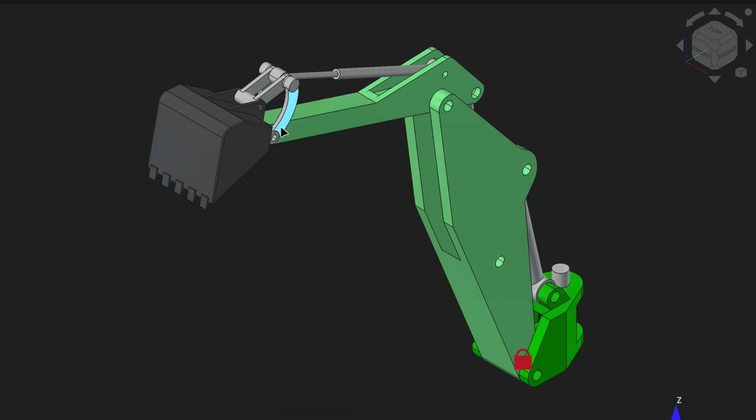FreeCAD has evolved rapidly recently. To make use of the new features, I'm doing a tutorial here to show you how to create this threaded bolt in just a few steps, for example, for 3D printing. Today, we want to design a simple bolt with a 1/4 inch internal thread and a square head. With the right approach, this is done in a few simple steps.

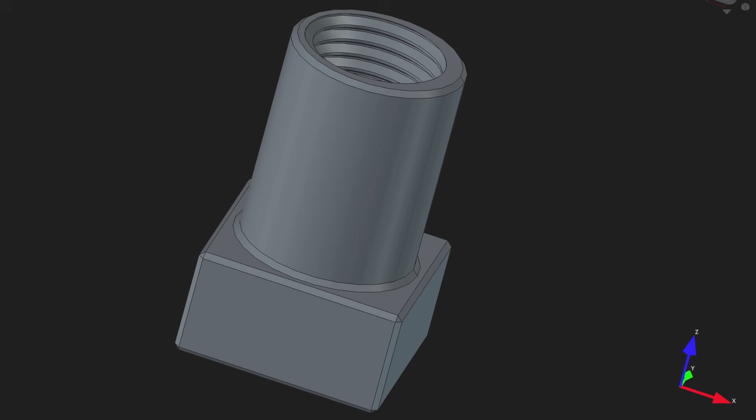To do this, we first create a new file. We select the correct workbench, in this case, Part Design. Then, we create a new sketch. For this, you may first need to select the body in the tree view on the left. Now, we select the plane we want to draw on. The XY plane makes sense here.

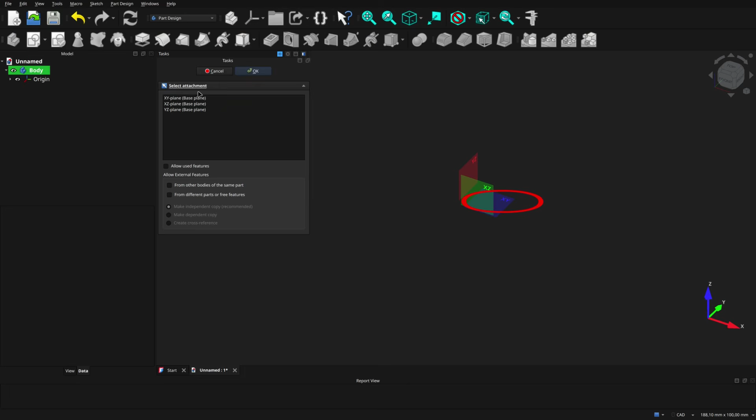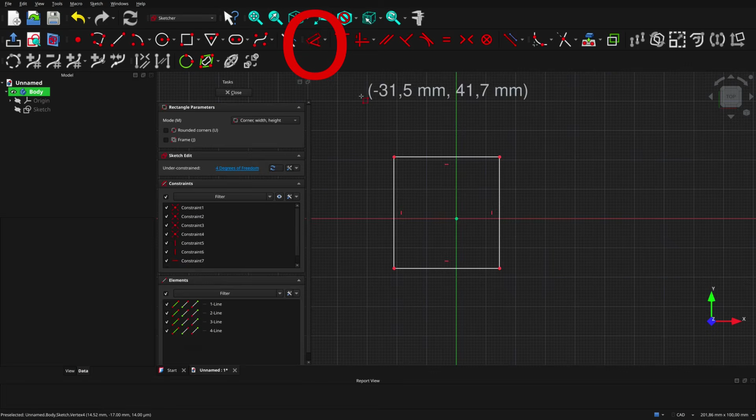It is important, especially for later, more complex drawings, to always construct around the origin as a central axis of symmetry. First, we want to create the square head for the bolt with a wrench size of 19 mm. We draw a rectangle around the origin in the center. We see 4 degrees of freedom in the sketch description, so we need to dimension the rectangle. To do this, we can click the lines themselves or the start and end points.

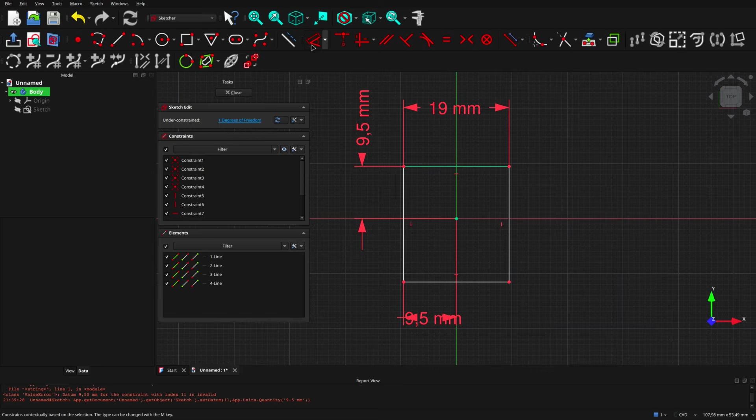For the position of an element, it is best to select the start or end point. The software will then automatically prompt for a dimension relative to the corresponding axis. The edge length is 19 mm, centered around the origin. Once the line is fully dimensioned, it turns green and can no longer be moved. You can always use this test if you are unsure whether an element is fully dimensioned, which happens quite often at the beginning. We do the same for the height, and the entire rectangle turns green. The sketch description now says fully constrained.

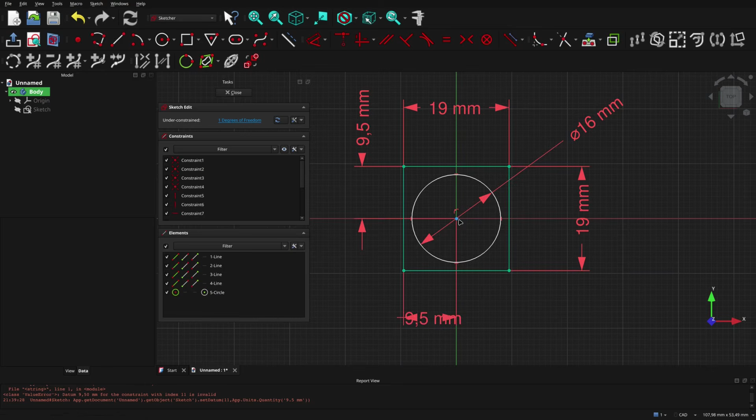However, we still need a cylinder for the threaded bolt. So we draw a circle and set the origin as the center point. It is important to hit exactly the origin. That way, we won't need to dimension the center point later. Now, we can either dimension the 16 mm diameter directly or do it later with the dimensioning tool, or change it if needed. The entire sketch should now be green and fully constrained. If not, you might not have placed the circle center exactly on the coordinate origin and will need to add dimensions manually. Then, the sketch can be closed. All necessary elements are present in our master sketch, the square profile and the bolt shaft.

Still in the Part Design workbench, we can now create a 3D body from this 2D sketch. For our sketch, the Pad feature is the one we want. Depending on the part, there are many other ways to further process a sketch. If the sketch isn't selected automatically, we need to select it. The best way to do this is in the tree view on the left. After that, we select the faces in our master sketch that we want to extrude. First, the cylindrical shaft with a 16 mm diameter. The face changes color and we can select the Pad option in the task panel.

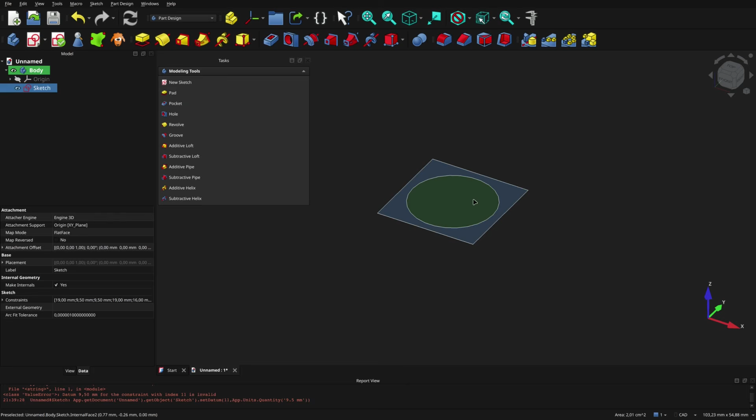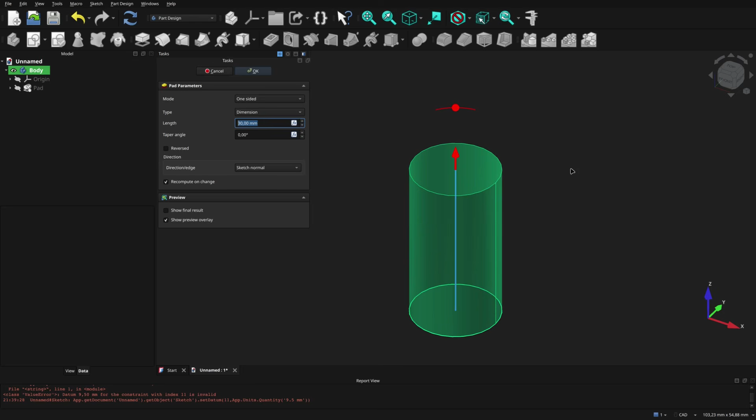Here are several ways to enter the direction and length. A very practical new feature is the ability to change the values directly in the model using the displayed arrows. This gives you an immediate idea of what the part will look like later. We simply want to extrude 30 mm in the positive Z direction, which means upwards. So, we set the value to 30 mm using the arrow in the model or in the input field. The direction should be correct by default. We click OK and the shaft is finished.

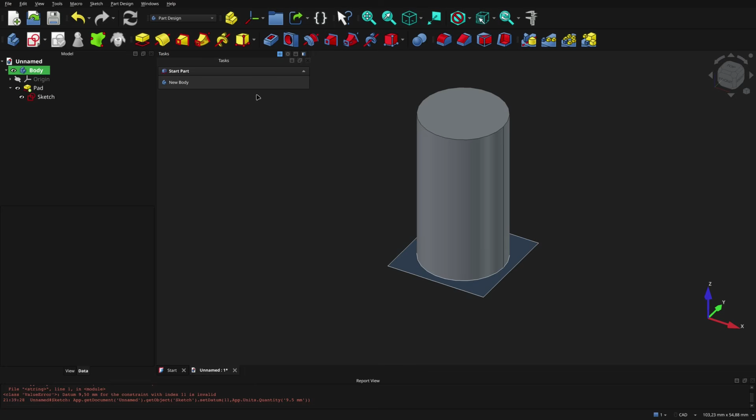Now it's time for the square head. We select the sketch again in the tree view. Sometimes there is a bug here and not all selectable faces are displayed. If that happens, simply select the Pad function once, cancel it and the face will be visible. This time, we only select the square and extrude it 10 mm in the same direction as the shaft.

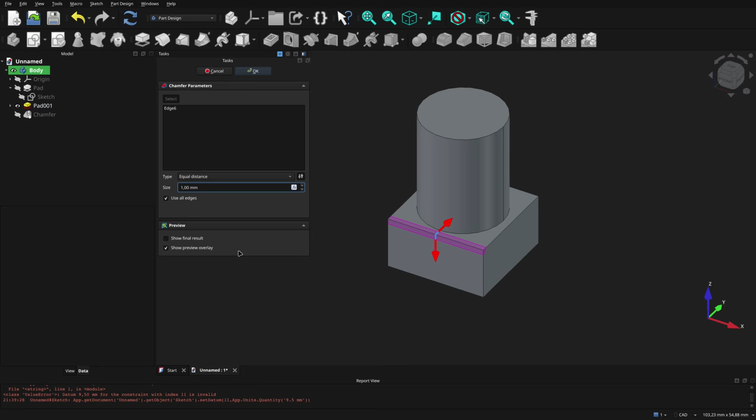Especially for 3D printing, chamfers on the edges are very nice. We select an edge. There are now various options in the task menu and we select chamfer. Now we can manually select the edges we want to chamfer or simply check the box to select all edges and enter the chamfer length, in this case 1 mm. Our bolt is already looking quite good, only the 1/4 inch internal thread is missing.

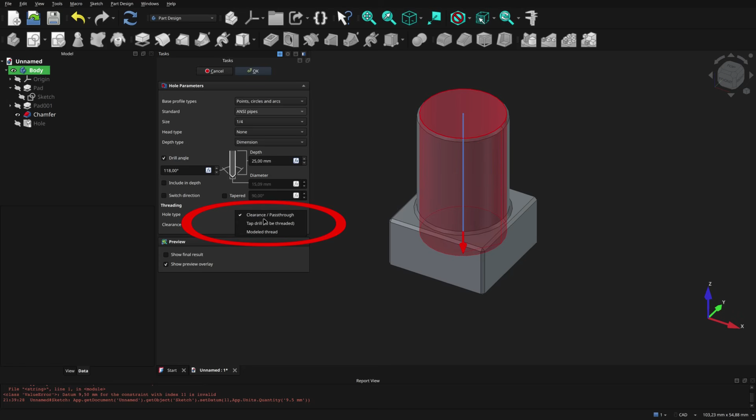To do this, we select the top face of the bolt and in the task menu we choose the hole option. We find the appropriate thread and check Modeled Thread. This way, the thread isn't just displayed for the drawing, it is physically modeled and can be manufactured with a 3D printer, for example. The software has to compute quite a bit here. On slower computers, this might take a few seconds. For more complex parts, it is best to model the thread only when the entire design is finished. Otherwise, further processing can be severely delayed.

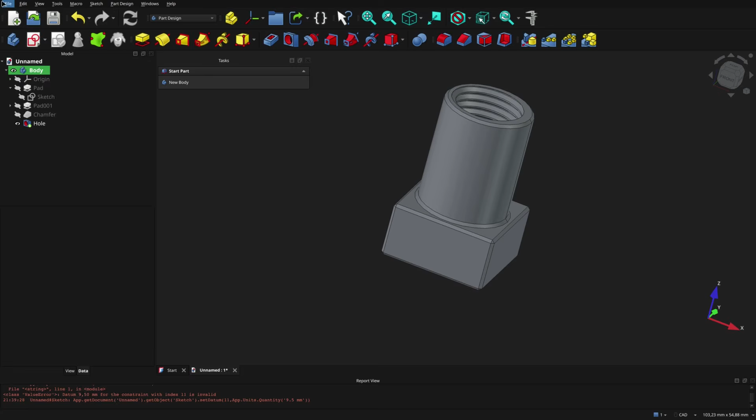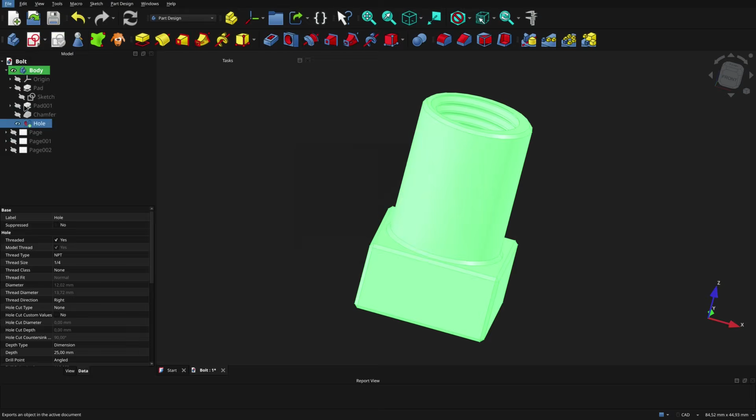Now, our threaded bolt is finished, and we should save the file. From the finished model, you can now create a manufacturing drawing, a CAM file for CNC machining, or a file for the 3D printer. To export the part, the body must be selected by double-clicking the model or selecting it in the tree view on the left. Then we can go to File, Export to select the appropriate file format and save our file for further processing. I like to use the OBJ format as it saves radii and details even more precisely than the STL format. We can now load this file into the slicer and prepare it for 3D printing.

My print turned out very nicely and fits perfectly, and I hope this tutorial was helpful to you.